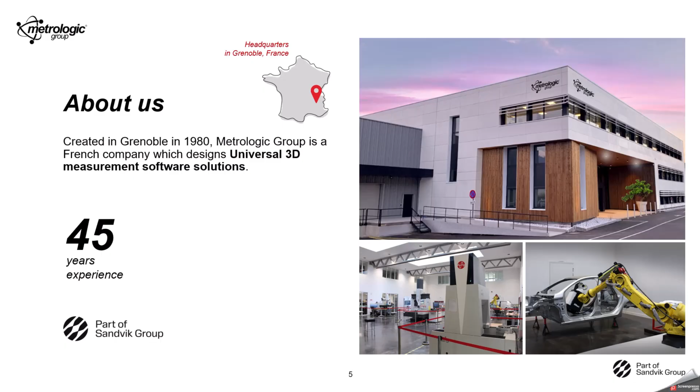About us, about Metrologic: we are a French company created and based in Grenoble, in France, but also everywhere to support you in Europe, Italy, Spain, Germany, but also in the US, India, and China. Metrologic Group designs universal 3D measurement software solutions, CMM-oriented, automation, and service. Today, we have more than 45 years of experience, and we have been part of Sandvik Group, a Swedish company, for 7 years.

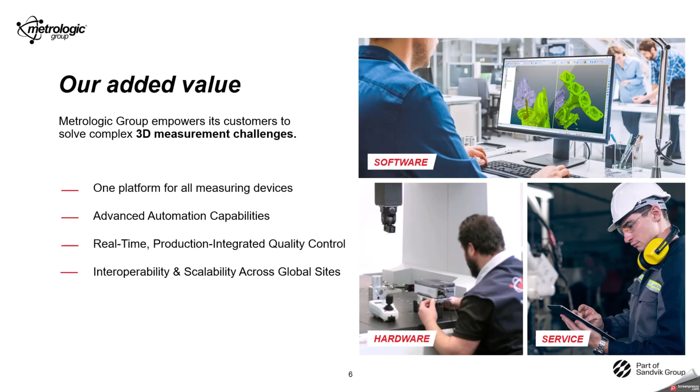We will help you to solve 3D measurement needs with software development, but also retrofit if you need to update your whole CMM, and we have a project team for your specific needs, specific projects. Our solution is designed for many applications, automotive, for example, but also aerospace, high accuracy, like the watch market. And we have today more than 15,000 users in 16 different countries.

Last slide about the company and our products. First one, Planner X4 to prepare your work and plan your inspection, create your view and your report before the inspection. Silma X4 to program offline and simulate all the trajectories without collision. Metrolog X4 for the online measurement with your CMM, for example, and the Manager Suite to monitor your process and interact with your production team.

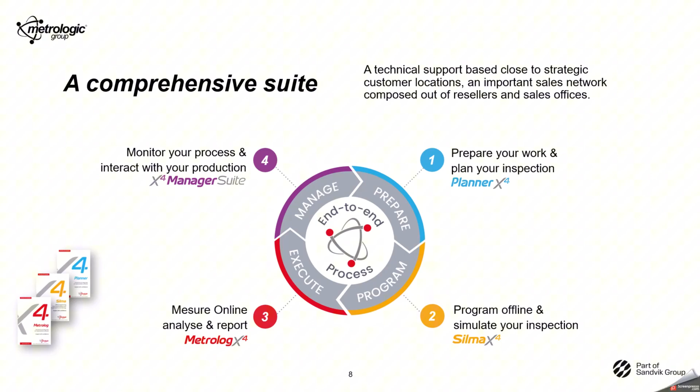Let's go now to the topic of today, the Revo 2. Ideal for complex mechanical parts or freeform geometry. Revo 2 is designed to handle the most challenging inspection tasks. Whether you're working with a complex mechanical component or freeform surface, this system ensures precise measurement even on highly complex geometry.

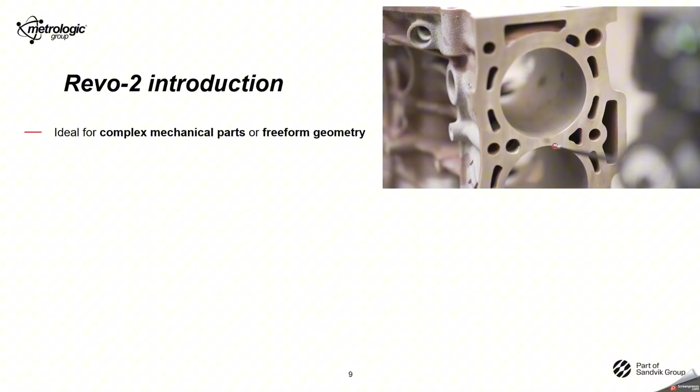Accelerate your inspection process without compromising accuracy. Speed and accuracy often conflict, but not with the Revo 2. Its advanced technology allows you to significantly reduce inspection time while maintaining the highest level of precision, helping you to improve your productivity without sacrificing quality.

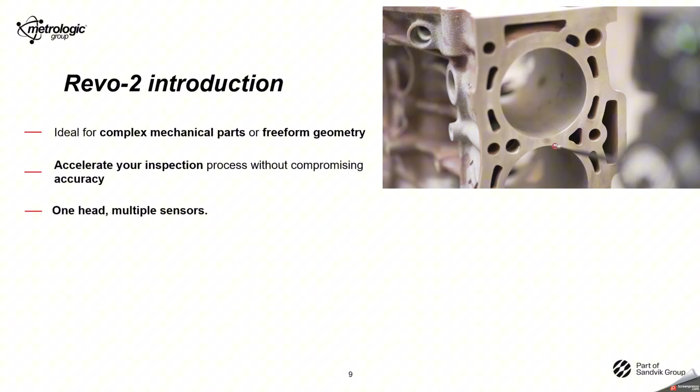One head, multi-sensor, very important. Flexibility is key. Revo 2 supports multiple sensors on a single head, enabling you to perform a wide range of measurements without frequent tool changes. The advantage is you will save time. No need to move the part to another device. Stay always on the Revo 2. Play with the roughness if you want, or maybe the RUP to measure the thickness.

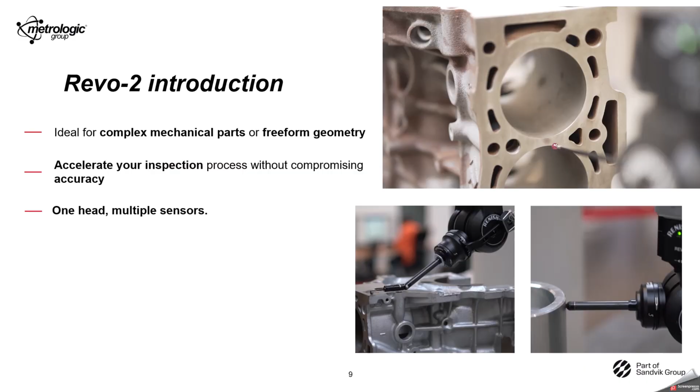5-axis technology compatible with market-leading CMMs. Revo 2 leverages 5-axis motion, delivering unmatched accessibility and speed. Plus, it's fully compatible with leading coordinate measuring machines, making integration seamless and cost-effective.

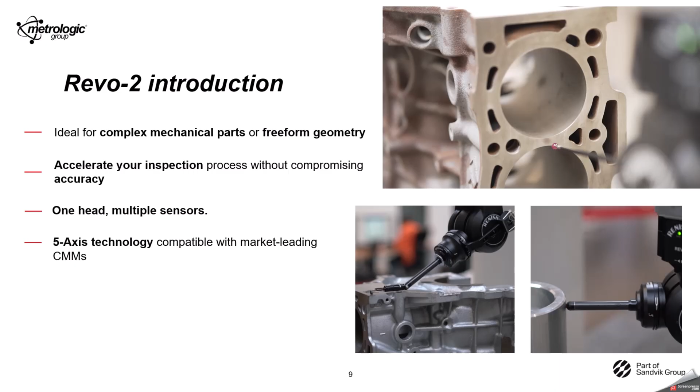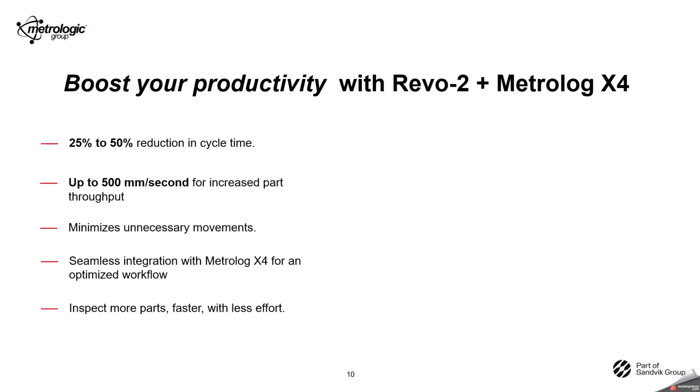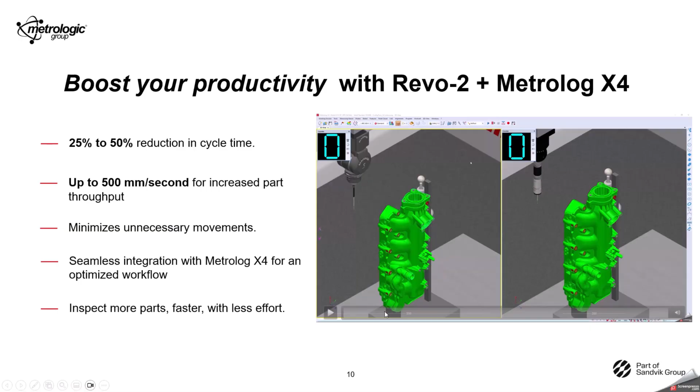Second, with scanning speeds of up to 500 mm per second, you will achieve higher part throughput without compromising accuracy. Third, the system is designed to minimize unnecessary movement, ensuring a more efficient and streamlined inspection process. Point number 4, thanks to the seamless integration with Metrolog X4, you get an optimized workflow that connects hardware and software perfectly. Finally, the solution allows you to inspect more parts faster with less effort. In short, Revo 2 combined with Metrolog X4 gives you the speed, the precision, and the flexibility, all in one integrated solution.

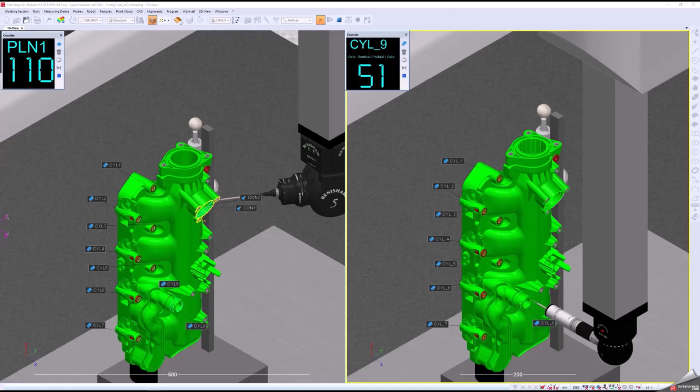Now, a short video to illustrate the improvement in productivity. We have the same part, the same program, and the same number of features. On the right, we have the PH10 head with the SP25 for contouring, and on the left, the Revo 2. Look at the difference in speed between the Revo 2 and the PH10. You save time with every orientation and every measurement. The images speak for themselves.

We have sped up the video for the example, but we are talking about several minutes saved per part. Imagine that across all your inspections. Boosting your productivity makes perfect sense.

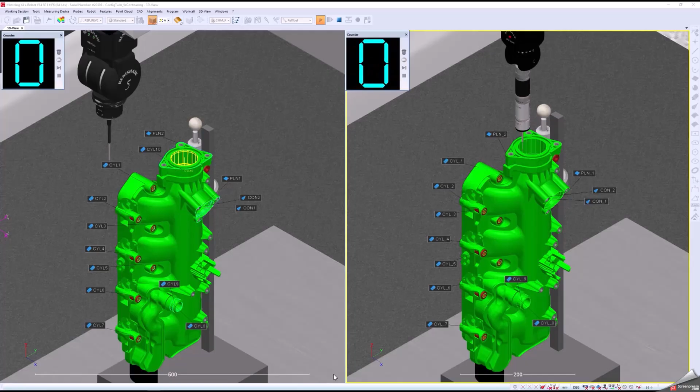Second, you can create inspection programs quickly, even for very complex parts, which saves a lot of time during programming. Just define the features on the CAD and measure it. No more, it's very easy. Point number 3, modifying strategies is very simple. You can edit your trajectory in the program at any time in just a few clicks and adapt your measurement plan.

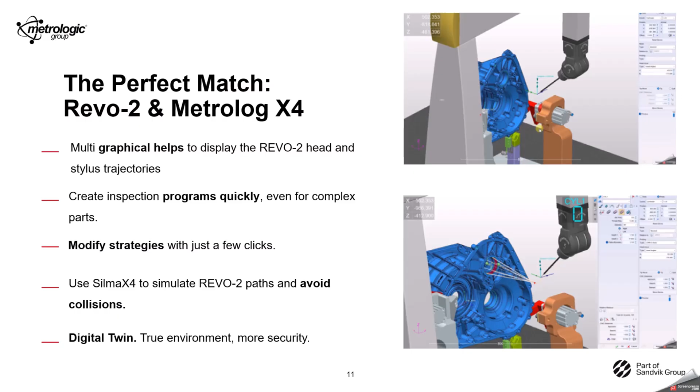With SilmaX4, you can simulate all the Revo 2 paths and avoid collisions before running the program on the real machine. You have a lot of possibilities with the clearance box, or with the collision management. And finally, thanks to the digital twin, you work in a true-to-life environment, which means more security and confidence in your process. You can create all the real environment with the same CMM, the head, the changer, and the part.

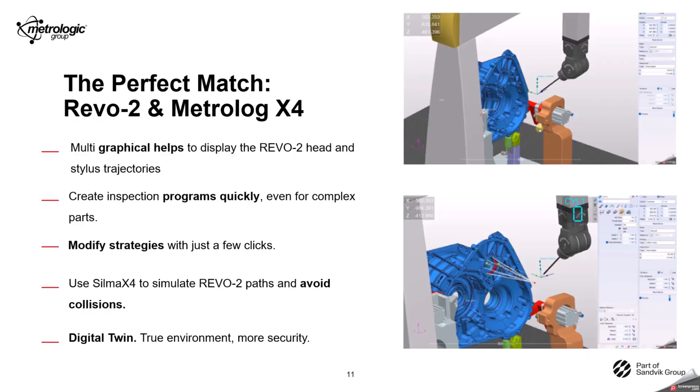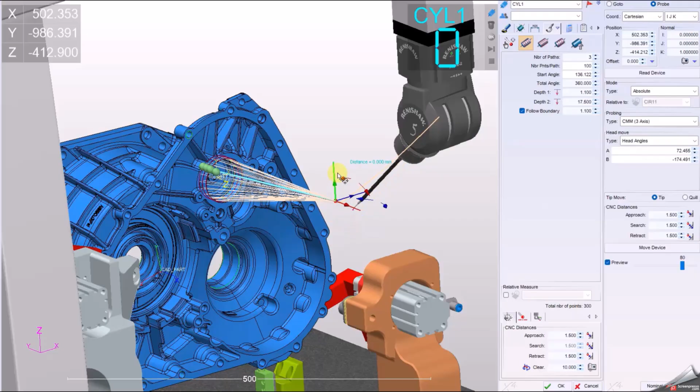A new video to illustrate it. I can click on the manipulator to move my head, play with the angle, see the preview, like this, click on OK to create the movement, or edit my strategy, like this. I can edit the trajectory, play with the manipulator, and click on OK to apply.

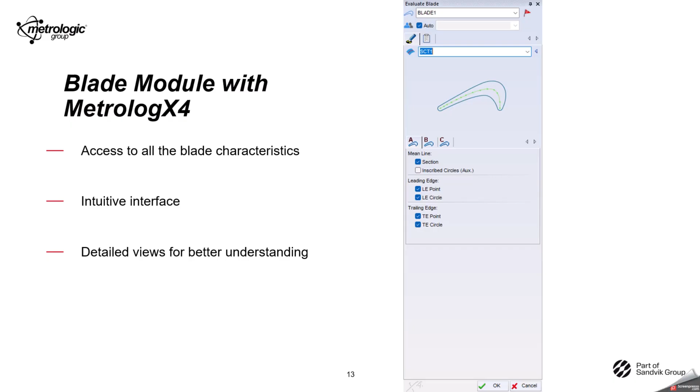Now, a quick example with some views and detailed views. We can see the deviation of each section, some information about the diameter, for example, and if we want, add the min and the max point for each section.

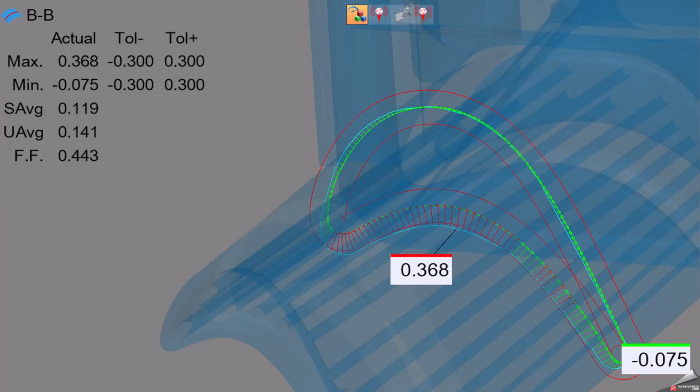Now I want to focus on how easy it is to analyze thanks to MetrologX4. As I said before, we have specific modules, if you want to analyze the surface texture, the GD&T, and the blade module for a complete analysis. You can use specific stickers with color for better decision making. Use clear and precise detailed views for your report at the end. The report can be generated automatically at the end of each program.

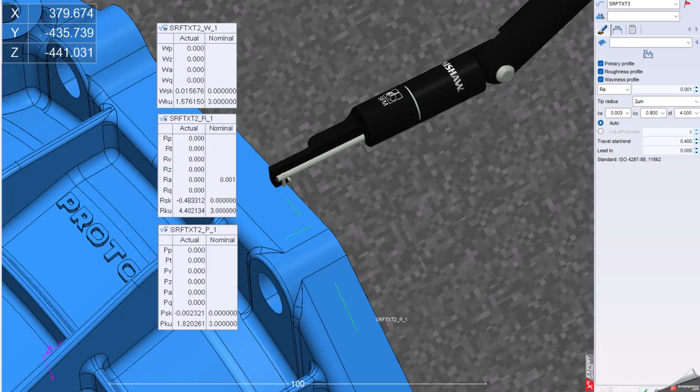Some examples with some views. The first one is the roughness and the characteristics you set and want to export, and an example of the roundness in detail view or the cylindricity. You can adjust the view as you want, add the stickers as you want on each view. And at the end, an example of the report that you can customize as you want.

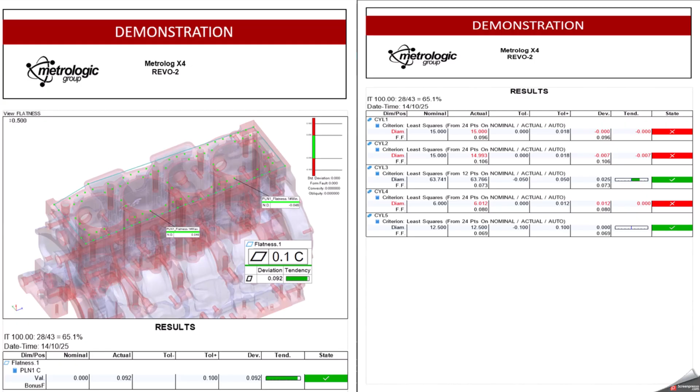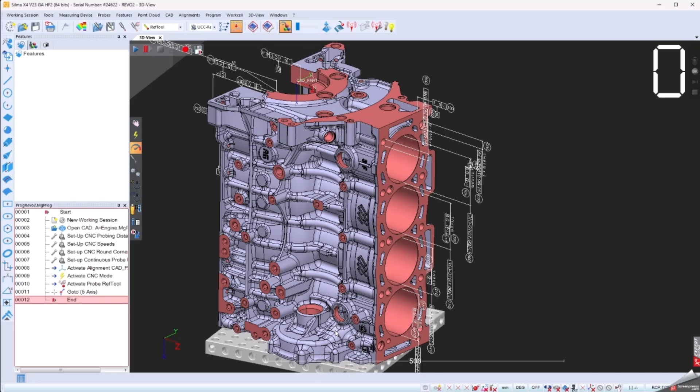It's time now for the first demonstration, and we will see all the first steps with the Revo 2. To better understand the power of this technology, here is a CMM environment with a typical automotive part, perfectly suited to the functions of the Revo 2, which you can see here, and the tool changer. We will use these tools later.

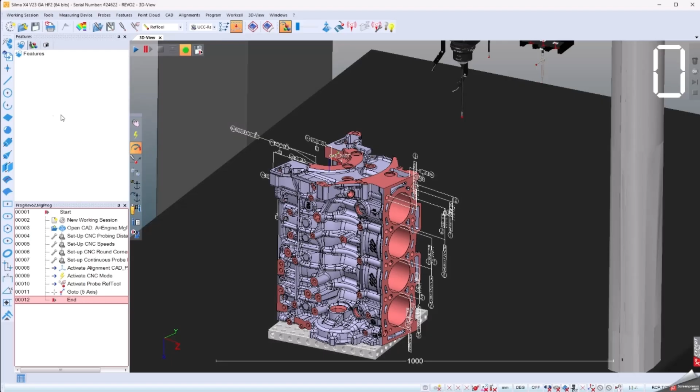Let's start our program by switching to learning mode. Next, choose the type of element you want to measure, such as a plane or a sphere. In our case, we will define and measure a cylinder. Simply click on CAD. Then define a measurement trajectory. We can see all the paths of the head in beige, the path of the ball in gray, and the type of paths in purple.

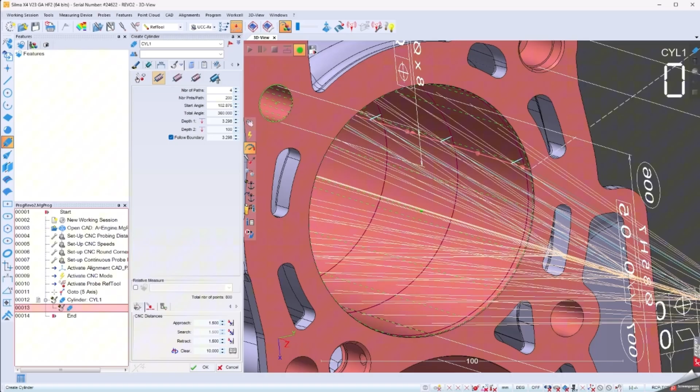We are free to configure the number of paths, the depth, and everything else that can be adjusted. The 3D view is automatically updated. Using the control key on your keyboard, play with the different manipulators to adjust the trajectories as you see fit. In this example, look, we have a collision. There are several ways to avoid them.

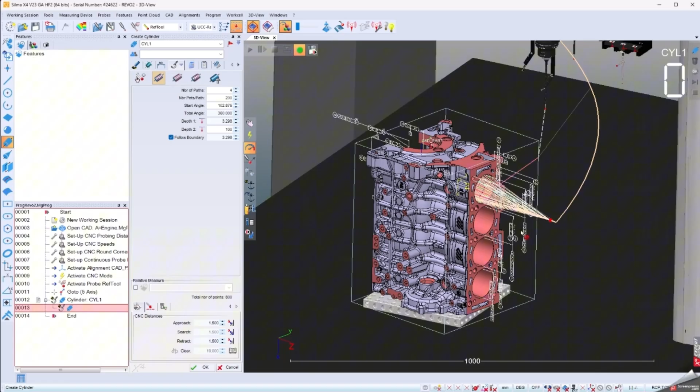Let's start by using the clearance box. This is our safety cube. Everything will pass above this box. Look, the trajectories update themselves. Then click OK to see the virtual machine move. It couldn't be easier to create your trajectory with adequate visual assistance. At the end, find your measurement results in the feature database and in the results table.

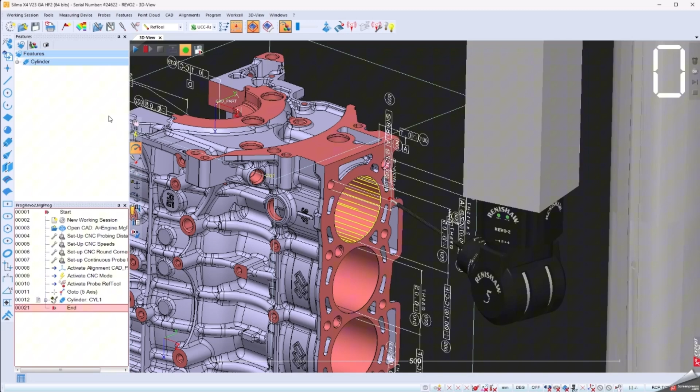Same way for the plane. The clearance box is always active, so we don't need to think about points to move the probe. Define the plane on the CAD, choose the perimeter path and adjust the parameters you want, like the cylinder. And we click on OK to start the measurement. Easy and fast.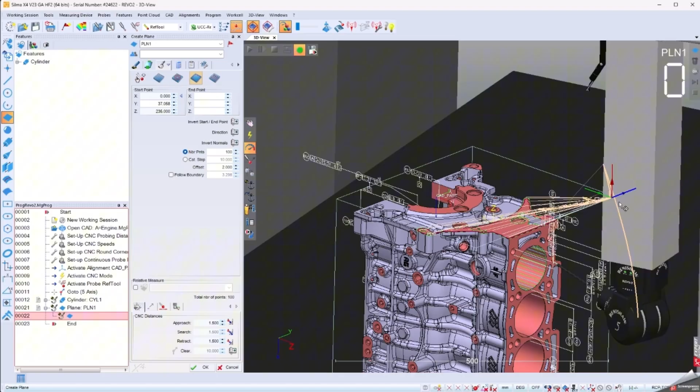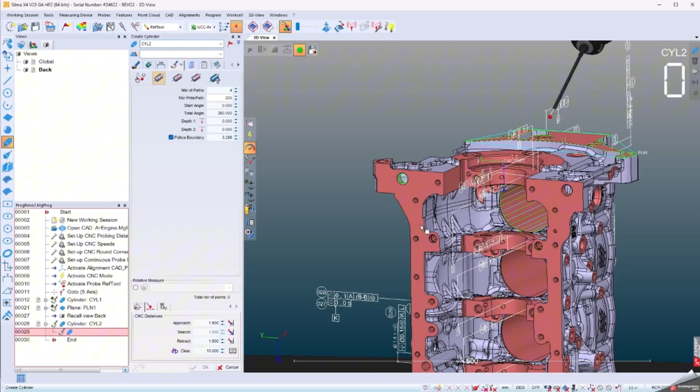Now focus on our collision management tool. Look, we disable the clearance box and I define a cylinder on the back of the part. We can see the collision thanks to the gray path on my ball. It's time to enable the collision management. As you see, Silma X4 detected a collision and will find the trajectory alone to avoid it. The trajectory is now safe. In just one click, we avoid the collision. At the end, find your measurement results in the feature database.

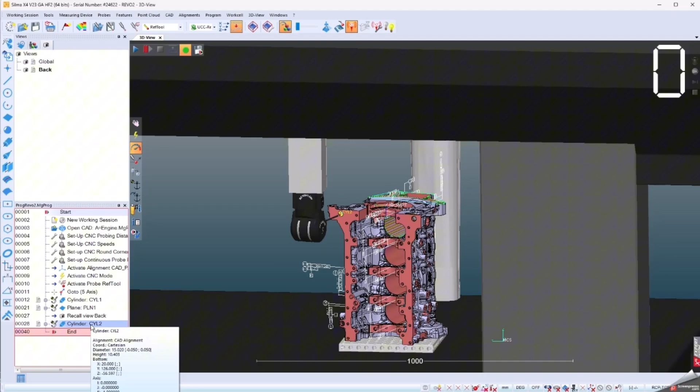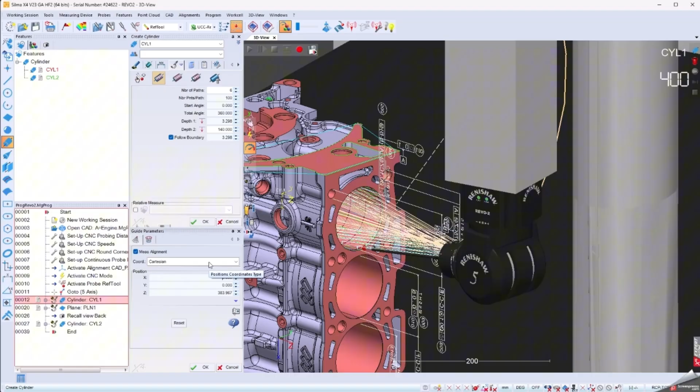Be free to adjust the program at any time. If we want to change a measurement strategy, it's possible. Edit the line in your program and set the new strategy. Some parameters are available, like playing with the XYZ parameters, which is equivalent to the manipulator and the control key seen previously. We can also play with the elevation angle or the twist angle if you want to go further. Once again, the trajectories are updated in the 3D view.

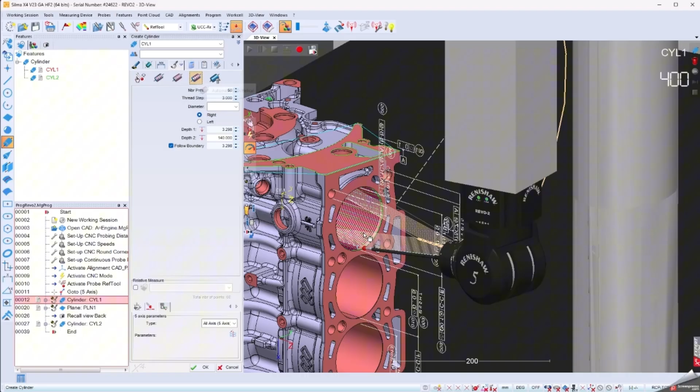For this example, we will select the automatic helical path, always with the possibility to set my own parameters. It's easy and fast. At the end, I can start my program on the virtual CMM or with the connected CMM.

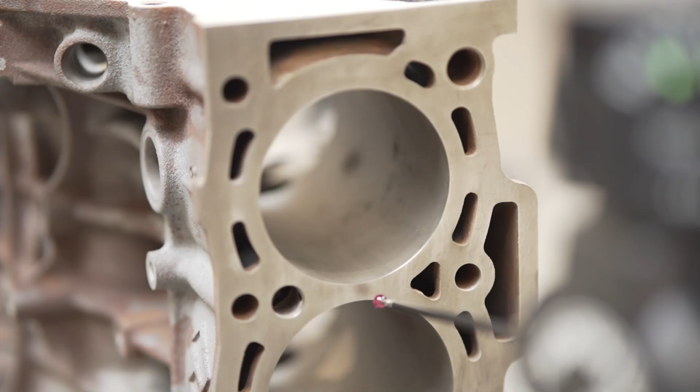You can see with this video the real trajectory of the cylinder. The time saved compared to probing touch is impressive.

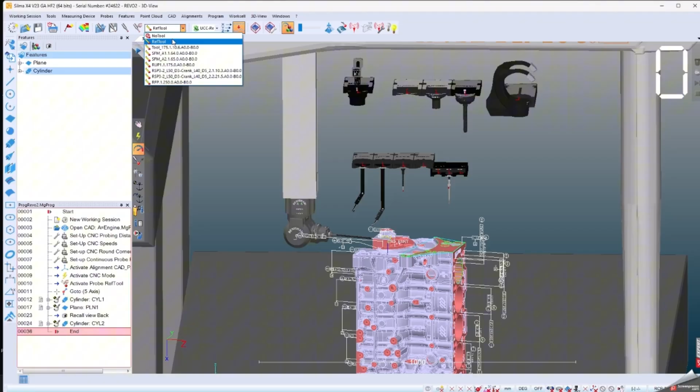It's time now for the demonstration number 2 with the rugosity, the RUP, and some sections for the blade module. We will create the section on Silma X4 and execute on the real connected CMM. Remember that we only have one head for many applications. Now it's time to change my probe for measuring surface finish. Select the tool from the list to apply the change. Movements during tool changes are also simulated.

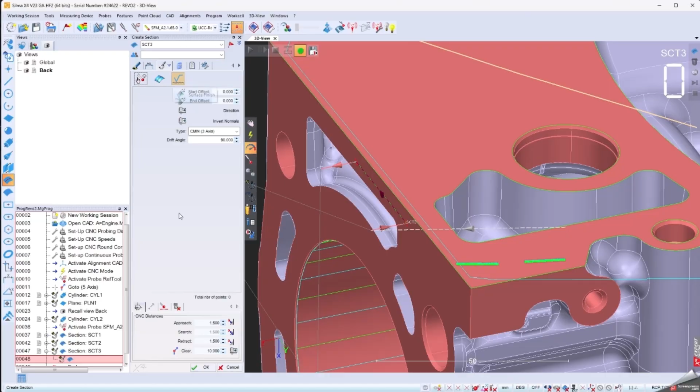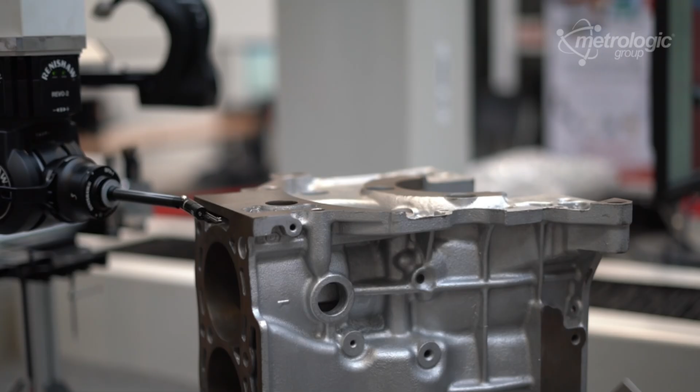After defining the sections to be measured and adjusting the parameters as desired, you can simply start the measurement offline, or, as with the cylinder, start the actual measurement on the connected machine. The Revo 2 will therefore allow you to perform other types of measurements for roughness analysis, for example in this case, without dismantling the part. Don't waste any more time moving the part to another device. Everything will be at your fingertips thanks to this technology. You can even use the Surface Finish module of Metrolog X4 for a more in-depth analysis.

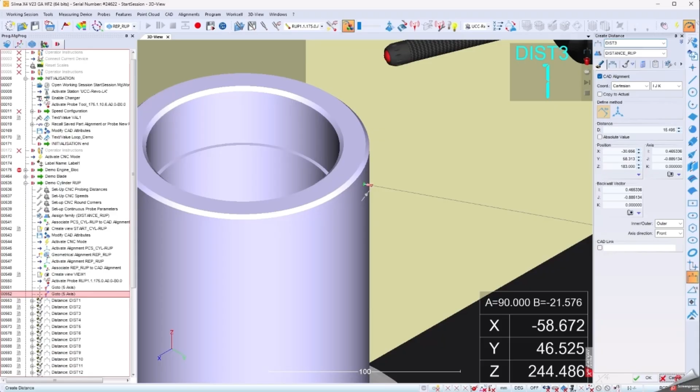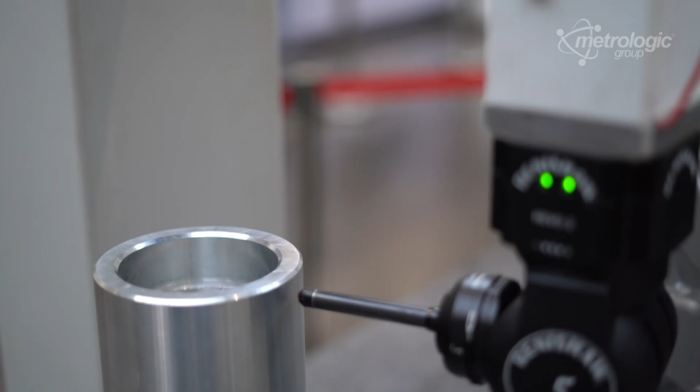It's time now to focus on the RUP, the ultrasonic probe by Renishaw offering an ultrasonic thickness inspection. You just have to define distance in one click on the CAD. Repeat the operation for each distance you want. You can start the simulation on Silma X4. When the trajectories are done and safe, start the control on the real CMM. It is easy and fast. With only one head, you have access to infinite measurement possibilities.

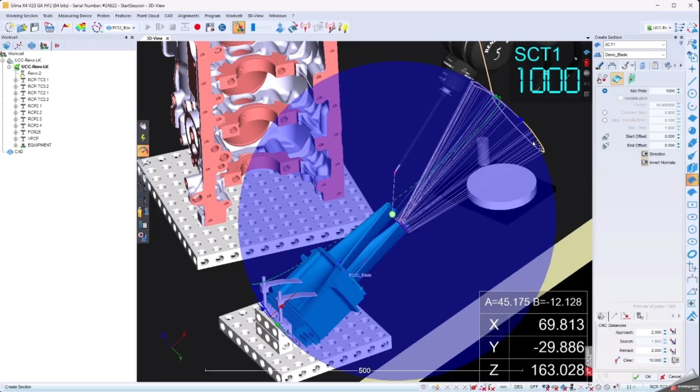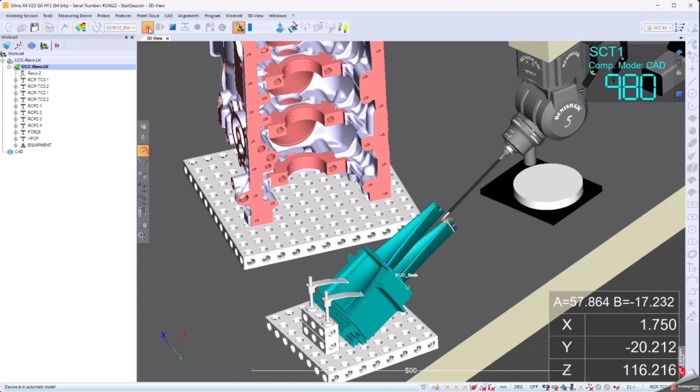In this example, create a section on your CAD. Select the measurement method. You can adjust the trajectories with the manipulators. You are also able to select another strategy. The trajectory selected is automatically updated in the 3D view. In each strategy, you are free to adjust it and play with the head angle. You have everything under control. At the end, click on OK to see the simulation of your Revo 2 head in Metrolog. Now let's play the program on the connected CMM. Fantastic, my trajectory is perfect.

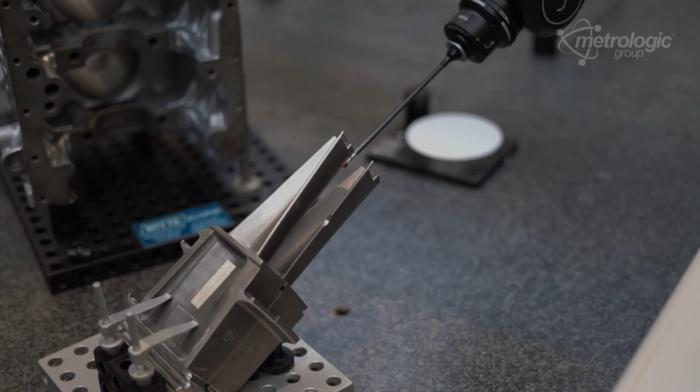Same process for the surface. Adjust different parameters if necessary, like the scan pitch. Click on OK and see the surface trajectory on the 3D view. And like the section, apply your program for the real part on the connected CMM. With all the graphic aids, it's easy and quick to program. You have control over everything with the visualization of each movement.

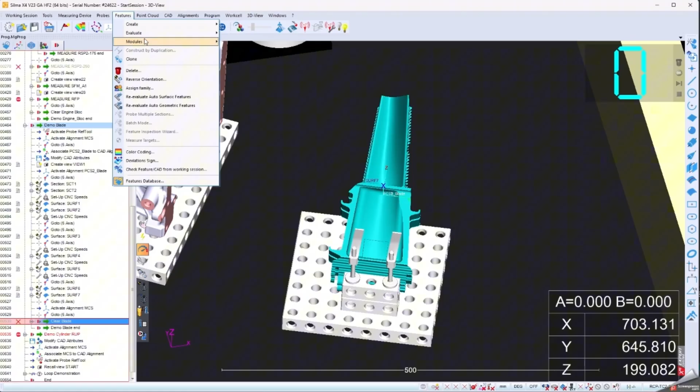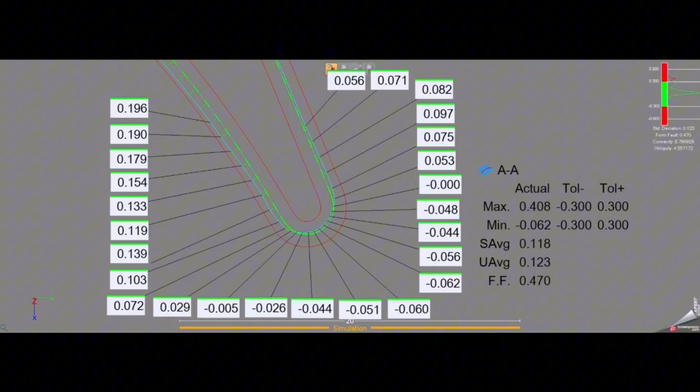Once you have measured your blade, go to the Blade module in MetrologX4 to select the sections to analyze. You can then use a powerful tool to highlight the leading and trailing edges and perform many other measurements. The module view is updated to make understanding easier and faster. The next step is to generate your views and stickers for the final report. You can display whatever you want, adjust each sticker according to your decision-making. Once again, you are in control.

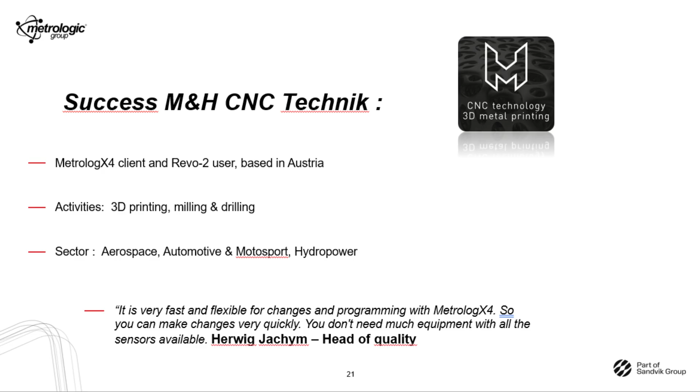Next slide, and a success story from one of our customers, M&H CNC Technik, based in Austria. They are a MetrologX4 client and also a user of the Revo 2 system. Their main activities include 3D printing, milling, drilling, and they operate in different sectors such as aerospace, automotive, motorsport, and hydropower. And as you can see, they love the way of programming with MetrologX4. They love the speed and the flexibility of the Revo 2. It's very easy for them to program. It's very quick. So we are very happy to have this customer with us. Thank you again to Herwig Jachym, the head of quality of the company.

Why choose Revo 2 with MetrologX4? Because precision meets performance. When speed, accuracy, and flexibility matter, the Revo 2 powered by MetrologX4 is the ultimate game changer for your inspection process. Why? Point number 1, ultra-fast 5-axis scanning. Imagine cutting your inspection time by up to 50%. With Revo 2's dynamic 5-axis technology, you can scan complex geometry at lightning speed without sacrificing accuracy. More parts inspected, less downtime, and a direct boost to your productivity.

Point number 2, one head and multi-sensors. Forget juggling multiple devices. Revo 2 integrates multiple sensors into a single head, giving you a universal platform for all your measurement needs. Switch easily between tactile probing, surface scanning, add the RUP, add the rugosity if you want, in only one setup.

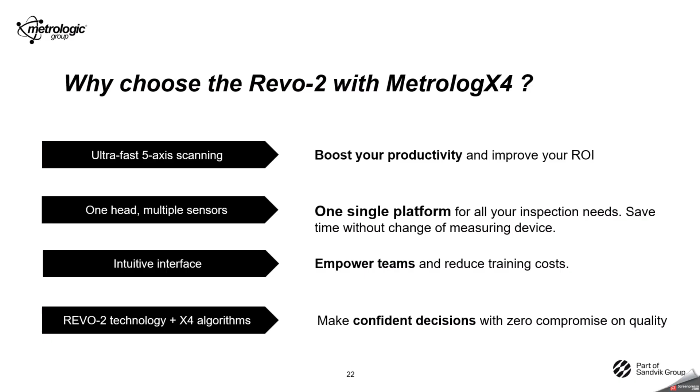Point number 3, intuitive interface. MetrologX4's user-friendly interface means your team can master advanced metrology without months of training. Empower your operators, reduce onboarding costs, and keep your production running smoothly. Revo 2 technology and X4 algorithms. Advanced algorithms combined with cutting-edge hardware deliver unmatched precision and repeatability. Make confident decisions with zero compromise on quality.